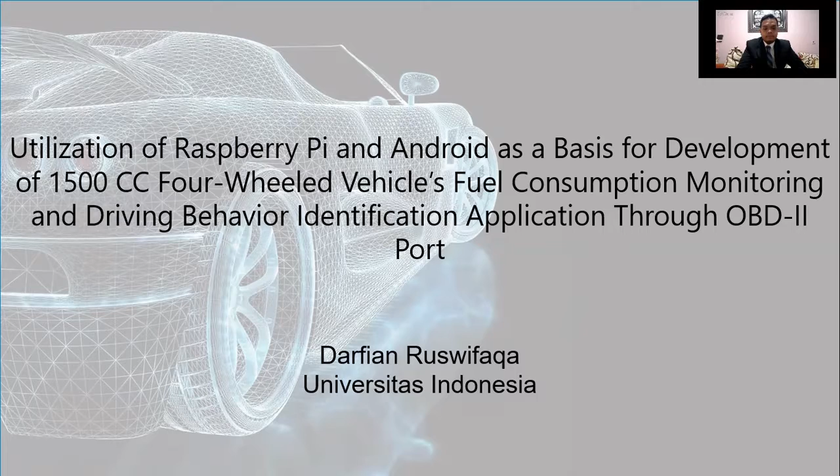This presentation will consist of four parts: introduction, supporting theories, research method, and discussion and conclusion.

The background that leads me to this research is the high vehicle ownership growth rate in Indonesia that reached 10% on 2016 to 2018. This growth is also accompanied by a surge in motor oil consumption, peaking at about 36.4 billion liters of oil.

Low efficiency on fuel consumption is one of the reasons to blame, with the culprit being improper driving behavior. Studies show that implementation of eco-driving will result in at least 7% and up to 40% fuel efficiency improvement. The problem is, it is not 100% effective as drivers rely on their personal judgment upon driving.

However, there is an opportunity to solve this problem. Most modern automobiles have OBD2 systems which could be utilized to acquire data from the car, such as for fuel consumption. This fact, combined with a huge potential on utilization of IoT, led to great opportunities to develop an application-based monitoring system.

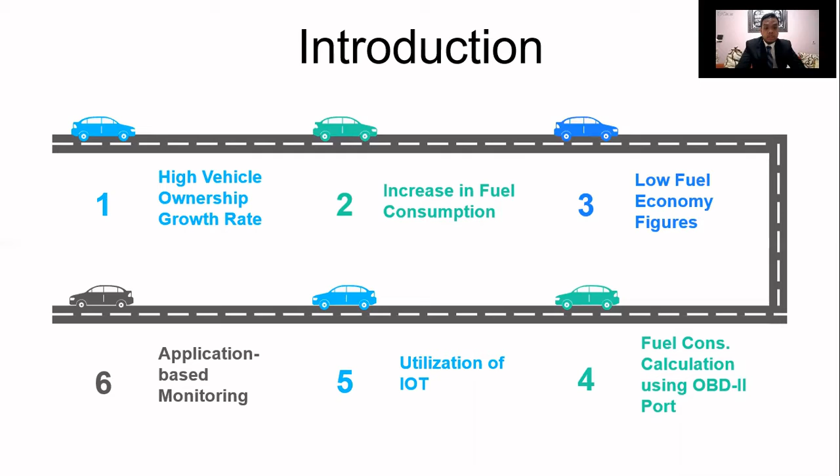This research used several supporting theories such as four-wheel vehicle fuel consumption, driving behavior, measurement system analysis, and mean absolute percentage error.

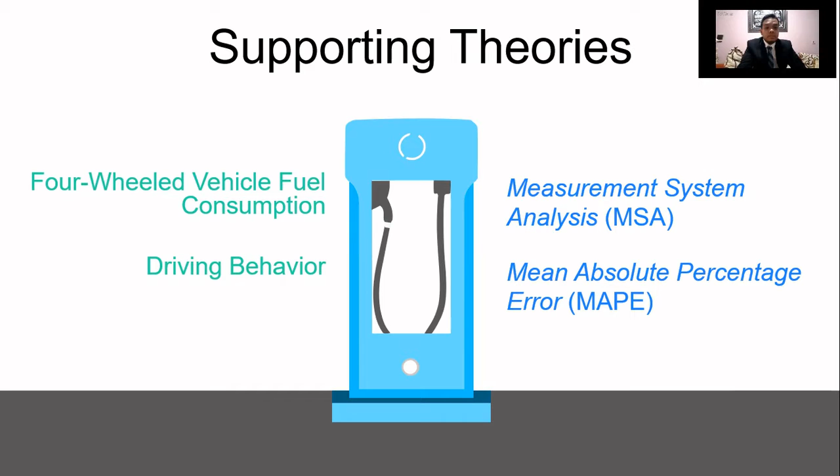According to Meseguer on 2015, automobiles' fuel consumption can be calculated using fuel flow and speed data, resulting in instantaneous fuel consumption. The fuel flow itself is a product of mass airflow times 3600 divided by the actual air-fuel ratio (AFRA) and fuel density (FD).

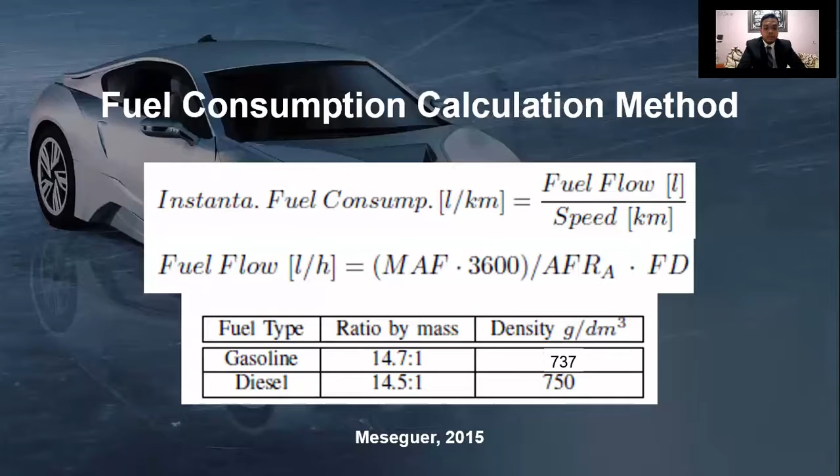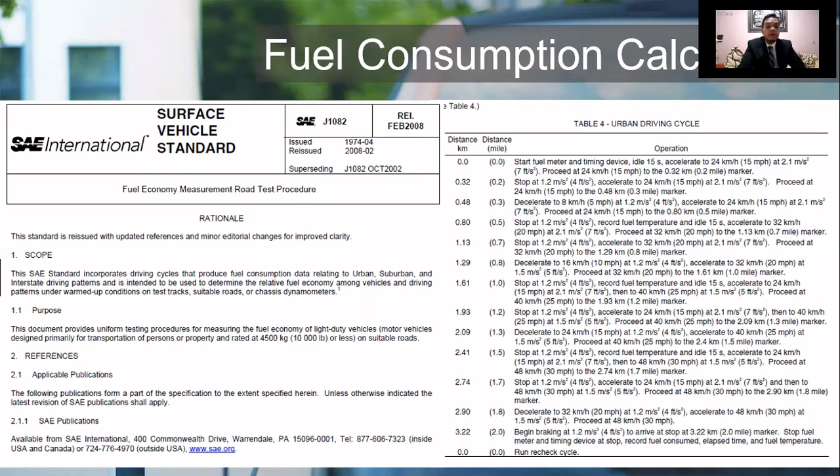In this research, the fuel density used is 737 gram per decimeter cubic. This research also uses fuel consumption calculation method from SAE J1082 standard to aid in calculating the fuel consumption of the full-to-full method used on the application verification.

One of the main components in this research is driving behavior. Canale on 2002 said that driving behavior could be described using certain parameters such as accelerator and brake pedal pressure. Also, Na Lin on 2014 stated that driving behavior could be categorized statistically using the said parameters.

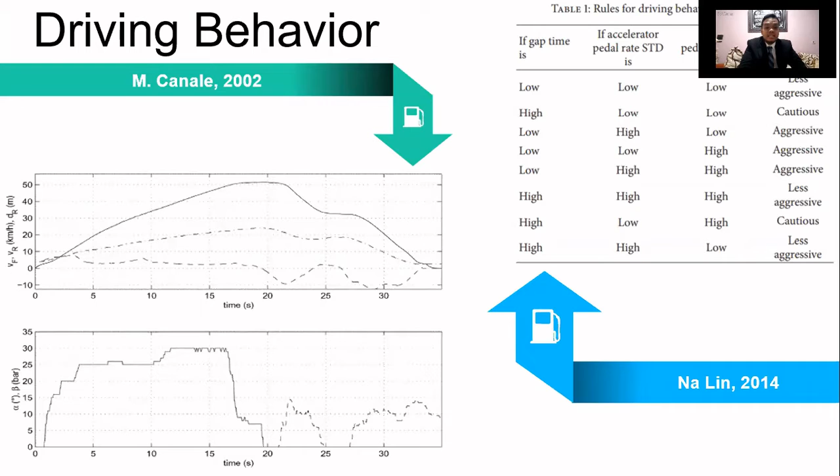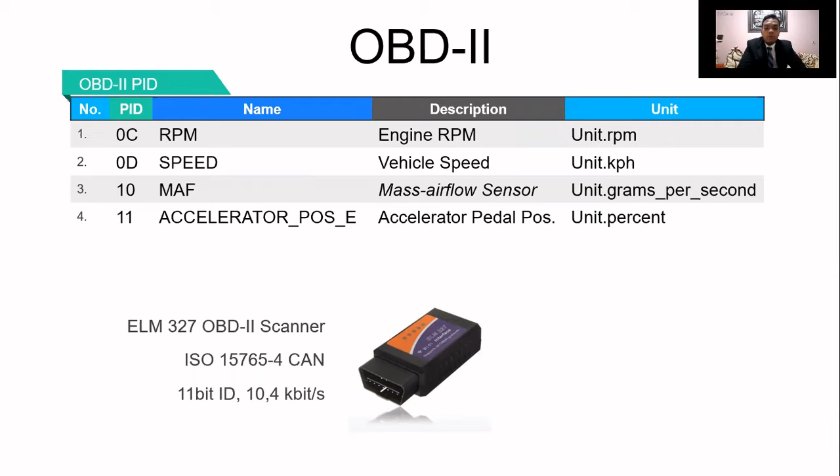This research collects several data from the OBD2 port. It has a PID number which is set according to standard. The acquired data are RPM, speed, MAF, and accelerator pedal position. This data is collected using an ELM327 OBD2 scanner that is connected to a computer.

Now, we will discuss the research method used in this paper. The research flow starts from problem identification all the way until the research method could be determined. Then, an application for initial data inquiry is developed to collect data and identify the driving behavior parameters. After that, the final application is developed and a verification method is applied for the application.

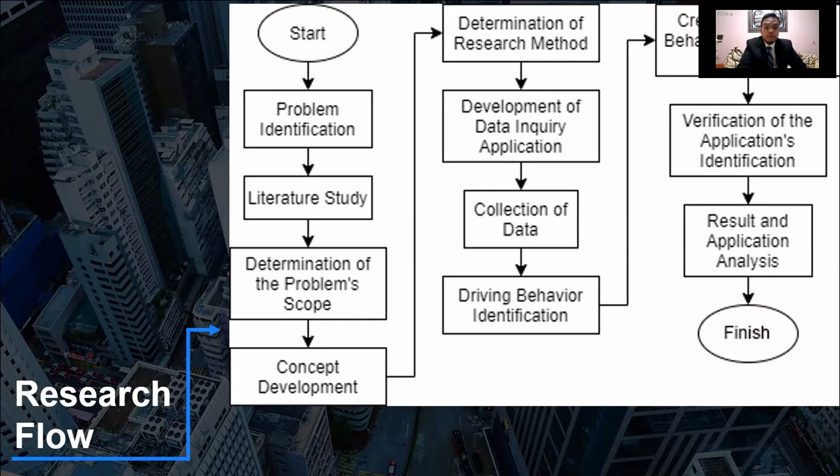There are several parameters used in the initial data acquisition. Those parameters are used to assess the driving behavior obtained from the test. 7 drivers are educated on the test protocol and route, then they are asked to drive according to their own judgment with the knowledge in mind. This protocol and route are used both in the initial data collection and final application verification.

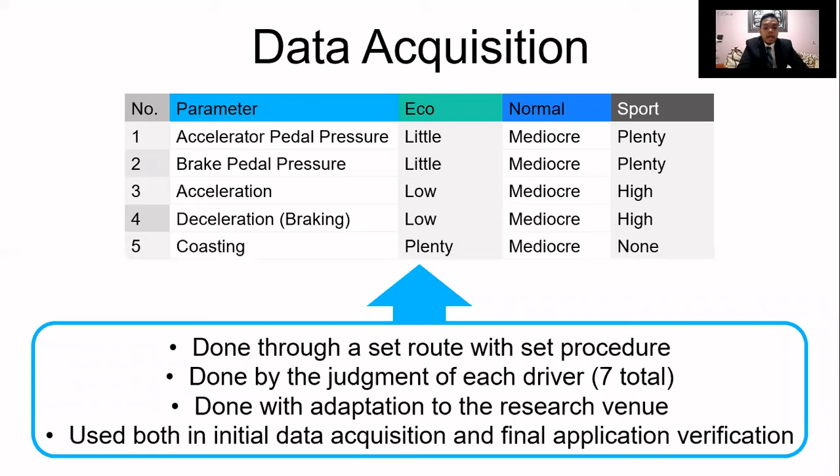In the final application, the full-to-full method is used as a means to verify the application. The procedure consists of filling up the fuel, resetting the trip meter, conducting the test, and calculating the consumed fuel.

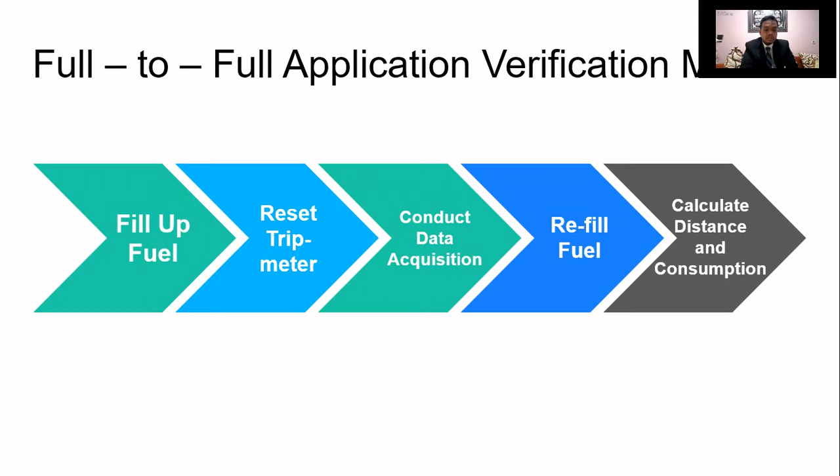The obtained data is processed in two ways. The first and second formulas are used to calculate the fuel consumption from the OBD data. The result, along with the accelerator pedal position data, will serve as the basis for creation of driving behavior identification.

The third and fourth formulas are used in the application verification process. Data from the second formula were compared to data from the third formula using the fourth formula. This is the sample of the calculated data.

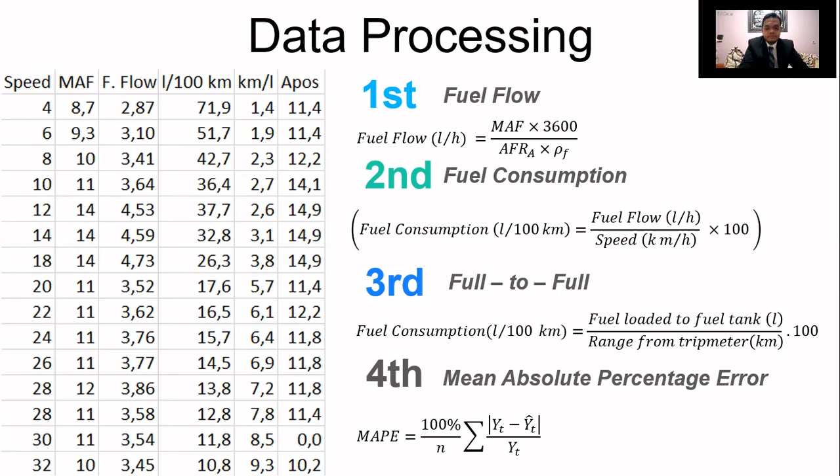The driving behavior identification process is done using accelerator pedal position and fuel consumption data obtained from the formula on the last slide. It is identified using measurement system analysis and histogram to easily recognize the reference points. The results are 3 drivers to conduct application verification process and 3 driving behavior classes.

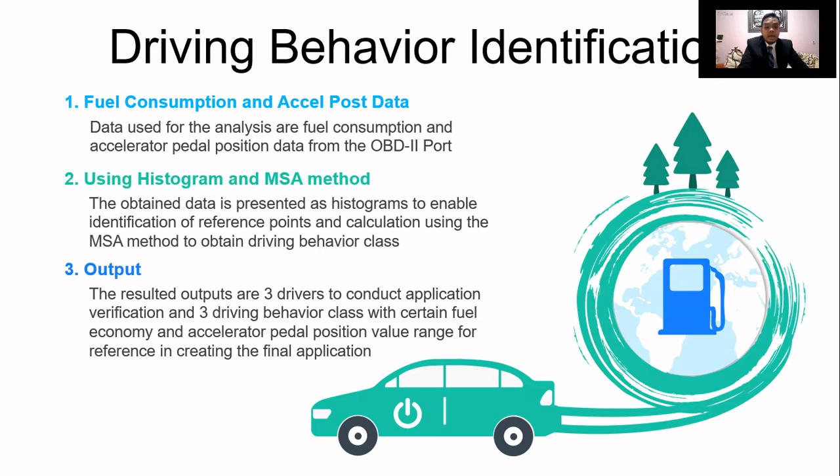Now let's talk about the discussion section.

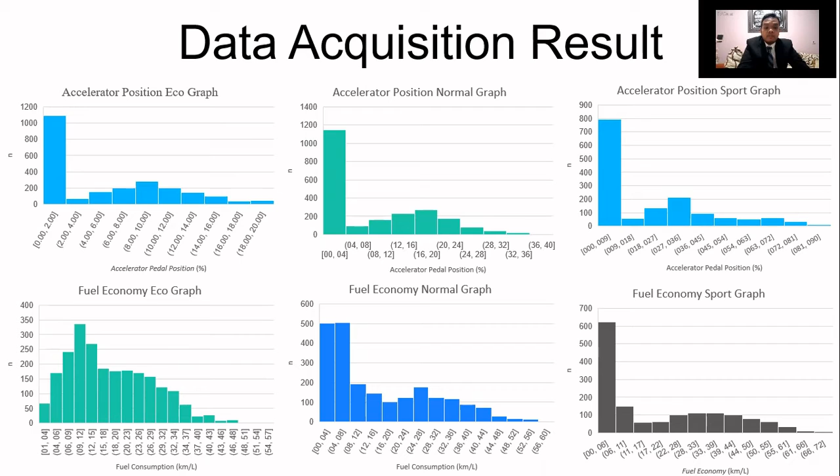The initial data acquisition resulted in the following histograms. Those histograms serve as a basis to determine the value of the reference points. This data is also used for the MSA method to determine 3 of 7 drivers for the application verification process.

The result of the MSA is a combination of 3 drivers, A, D, and E. Those drivers are chosen from their combination fuel economy and accelerator pedal value.

The percent EV value of under 10% shows that the data acquisition is precision enough. Percent AV and percent R&R shows little variation between each driver, which is a sign of good repeatability and reproducibility. Lastly, high percent PV value shows that each driver could differentiate between each driving behavior.

The distribution histogram also serves to differentiate values between each driving behavior as shown on the table.

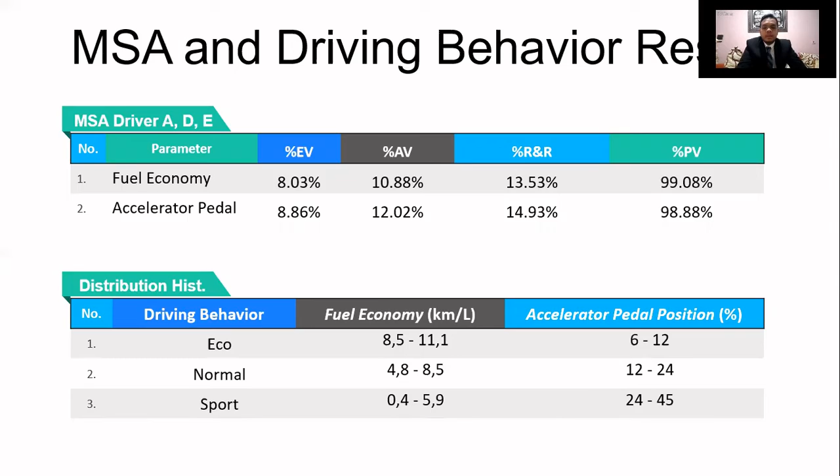The application verification process is done on 3 days with 3 sessions on each day. Each session consisted of 100 km of distance, with each day covering 300 km, for a total distance covered of 900 km for the whole experiment.

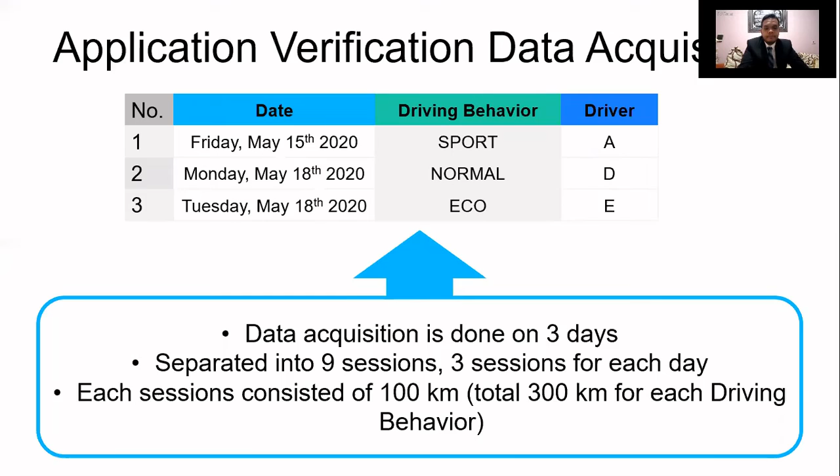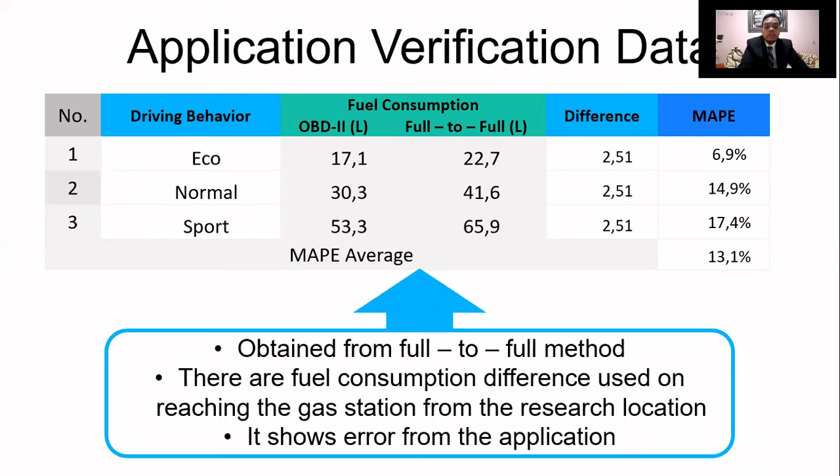The application verification data is obtained from the full-to-full method. It is used to determine how accurate the final application is at displaying the data. The error figures are calculated from the OBD and full-to-full data using the mean absolute percentage error formula.

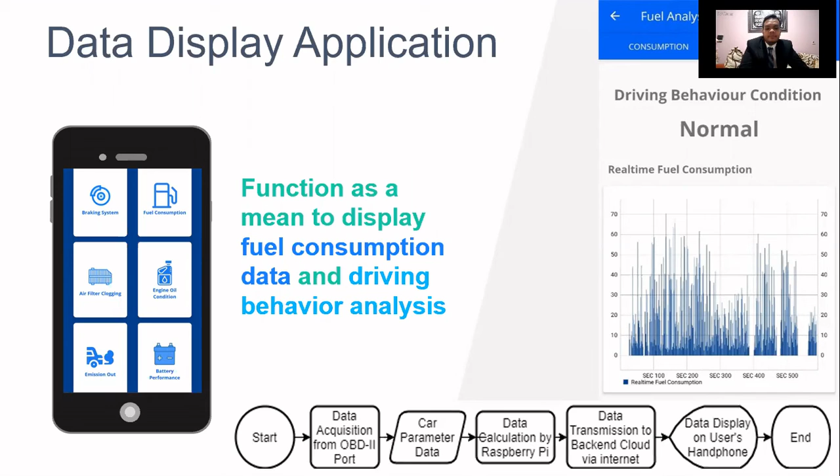The backend cloud stores the data and sends it upon request from the Android application. Finally, the user can see the data on the screen of their phone.

The conclusion of this research is that the range of fuel efficiency obtained is in the range of 8.5 to 11.1 km per liter for eco, 4.8 to 8.5 for normal, and 0.4 to 5.9 for sports.

The accelerator pedal position figures obtained are in the range of 6 to 12% for eco, 12 to 24% for normal, and 24 to 45% for sports.

The error regarding the fuel consumption resulting from the application compared with the fuel consumption of the full-to-full method is an average of 13.1% with a standard deviation of 4.5%.

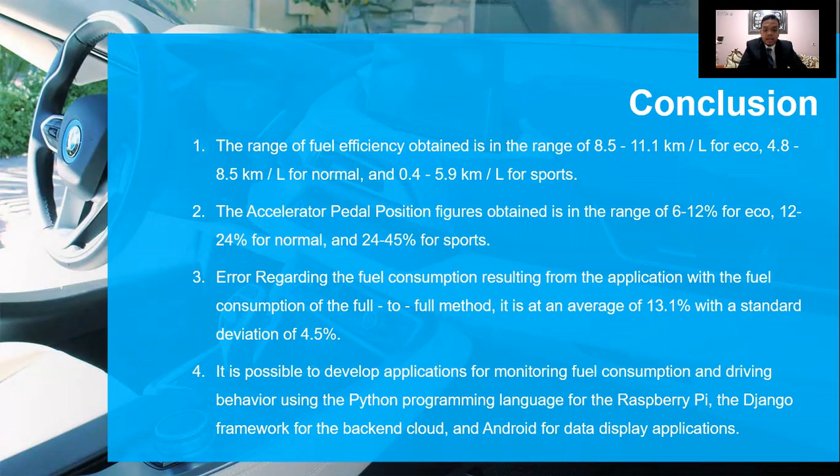Finally, it is possible to develop an application for monitoring fuel consumption and driving behavior using the Python programming language for the Raspberry Pi, the Django framework for the backend cloud, and Android for the data display application.